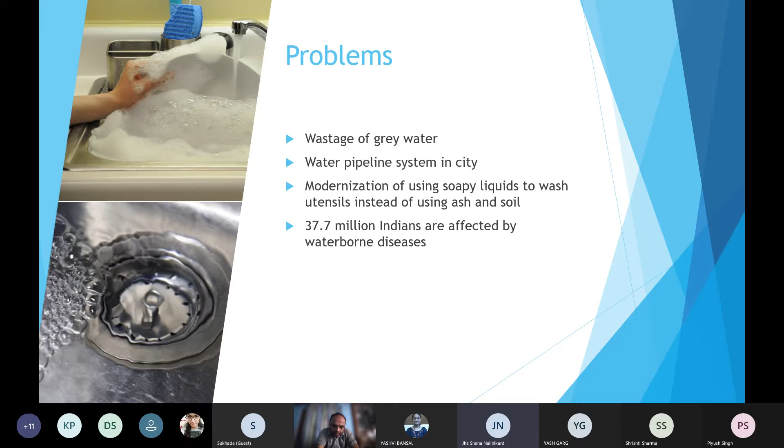The problems we are focusing on: the grey water that is wasted from washing dishes and bathing, and the water pipeline system in cities which is not correct, so we will focus on that too. Also, the modern use of soapy liquid to wash utensils instead of ash and soil, and many people are affected by water-borne diseases, so we are focusing on these problems.

Our attempted solution is to develop a solar thermal evaporation technique using parabolic mirrors, pipes and coolants, and mineral-coated pipes to add required minerals. We are also planning to make a new structure for building piping systems, and for less polluted water, we will use simple filtration techniques.

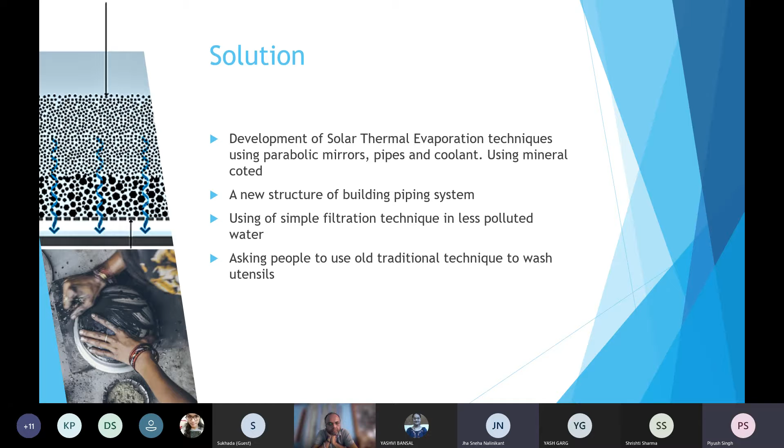We also want to make people aware and encourage them to use the old traditional methods to clean utensils, so that the water will not be polluted as much.

So how we are implementing this: in buildings, we will put two sinks in the bathroom and basin. In one sink, only the non-soapy water will go, because sometimes we're just cleaning dirt, not using soap. That goes through one pipe, and soapy water goes through another sink's pipe, using sensors for that. It will work similar to how in our food pipe, air and food are separated.

Then for non-soapy water, it will be purified easily in the buildings using net sand and simple filtration techniques, carbon and all. For soapy water, we will take it to our solar distillation plant and clean it there.

Since the water will be totally pure, there will be an absence of minerals, so we have to add minerals back in according to need.

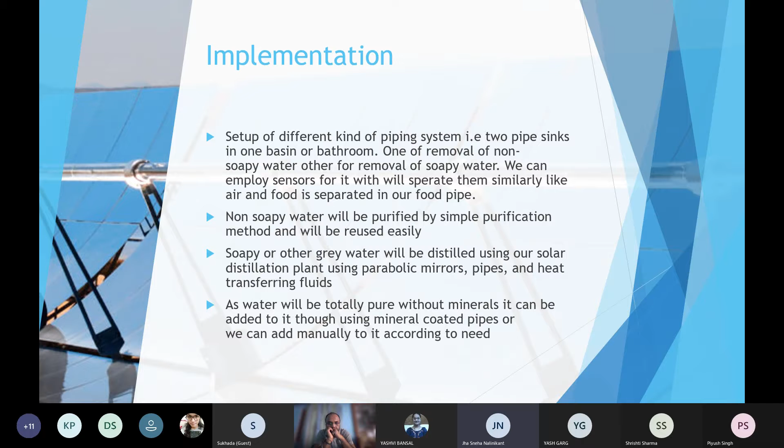Our working process is very simple: parabolic mirrors will concentrate the heat of the sun onto one pipe, in which water will be present, and it will get heated too much. Then we use that heat to evaporate the grey water in one container. This contains a simple distillation setup working like that.

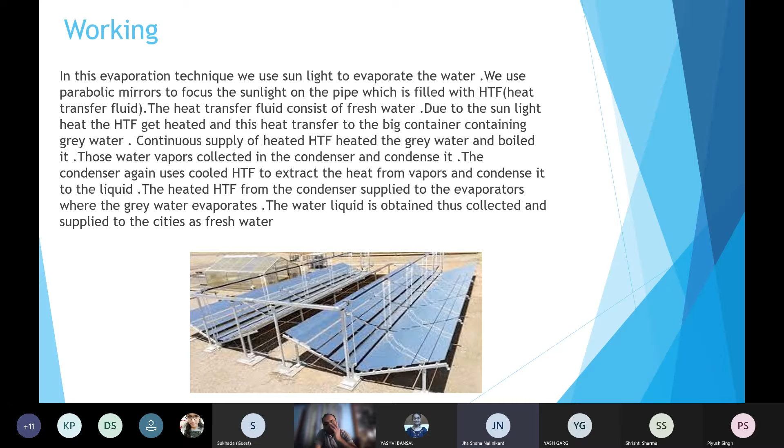We heat the fluid inside, and that heat is transferred to the water, which evaporates and is then condensed in another container, obtaining pure water. Then, by adding required minerals, or coating required minerals on pipes, we send that clean water to the city.

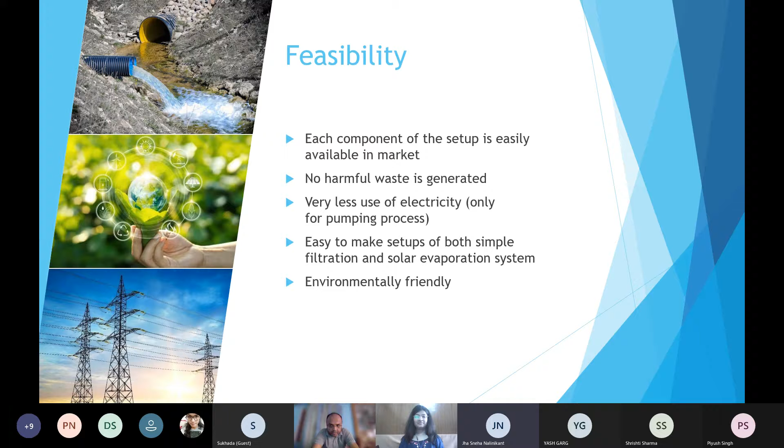As for feasibility, each component of this setup is available in the market. It is also not harmful. We are using solar energy, so there is very little use of electricity, maybe only in pumping processes. This setup is simple and environmentally friendly.

The cost of pipelines, mirrors, and tanks might not be much, and since we are using a renewable source of energy, there is not much electric cost.

The water impact will be that water is purified easily and energy is saved. Since there are special setups in buildings, people will be more aware to save water and try to conserve it more. Waterborne diseases will reduce, and people will get perfect mineral water afterward, according to requirement.

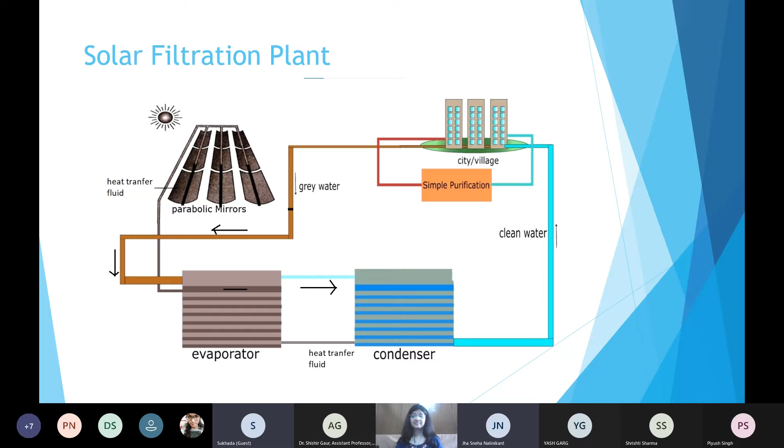And what are your plans to do that? Sometimes it happens that we see a very green type of thing, like in a train also. If we find that all the compartments are good and a dustbin is very near, then people will throw trash there only, but if it's not there, they will throw it out of the window. So also here, if they see that nice setups are made, they will be more spontaneous to save it.

Let's understand what are the problems pertaining to it. Currently, due to a lot of grey water, the water body sources are quite heavily contaminated, which causes a huge amount of deaths and diseases in our country. There is no proper way to measure these contaminants as well as eliminate them. Also, eradication of heavy pollutants like heavy metals and dissolved organic matter is really difficult to achieve at a greater stage, due to which we can see the amount of pollutants increasing severely in the drinking water.

The rate of pollutants is rising at an alarming rate. This goes beyond the consumption level of any human being, and due to this we are seeing a lot of diseases and deaths due to waterborne diseases.

Let's understand what are the impacts of it. In the last 4 years, India has seen around 8,000 deaths due to unclean water, which means every 4 hours one person is dying. Averaging this to a year, on average around 2,000 people die, as per the data of the Ministry of Health.

So can we solve this? Do we have any solution for this? Yes, we propose a three-step model for this, which states detection, eradication, and sustenance. Firstly, we'll have to detect all the pollutants or contaminants present in the water, then try to step by step eradicate them eventually, and sustain the clean and healthy water so that waterborne diseases are completely eradicated from India.

For that, we are introducing a new product called the Jal Rakshak. Basically, it looks like a thermal flask which we use to carry hot water, and let me tell you, it would be probably the same size.

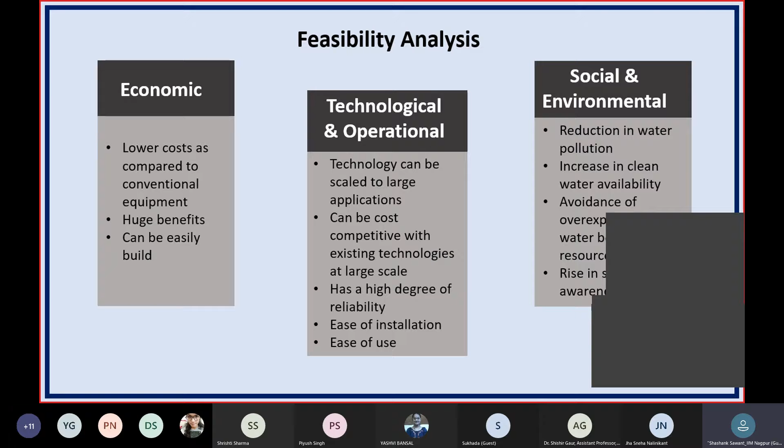Let's talk about the social analysis and feasibility. The pollution in water does reduce to a greater extent if we install this in a timely manner. Also, clean water becomes available to rural people, and the diseases pertaining to it would definitely reduce due to this. Although we do face key challenges, the first would be the maintenance of the device.

Since the device would be completely submerged in water, we would be needing timely maintenance of it, and keeping track of the devices would be really necessary, especially in rural areas. India is a vast land with around 12,500 water bodies, so it would be really difficult to cover all of them.

The time could be decades if we want to cover all the water bodies in India. Also, educating communities in rural areas is particularly important, because they would just take the device out and throw it away, which is a huge problem in rural India, and that's why a lot of schemes are also not implemented properly at the bottom of the chain.

What impact would this solution have? Due to the cleanliness we are going to get, deaths due to waterborne diseases would go severely down, which would also help India in achieving a sustainability development goal. Also, the efforts and expenditure spent in storing water would be saved to a greater extent, and with that, the social and economic condition of the communities would improve at a greater level. Thank you.

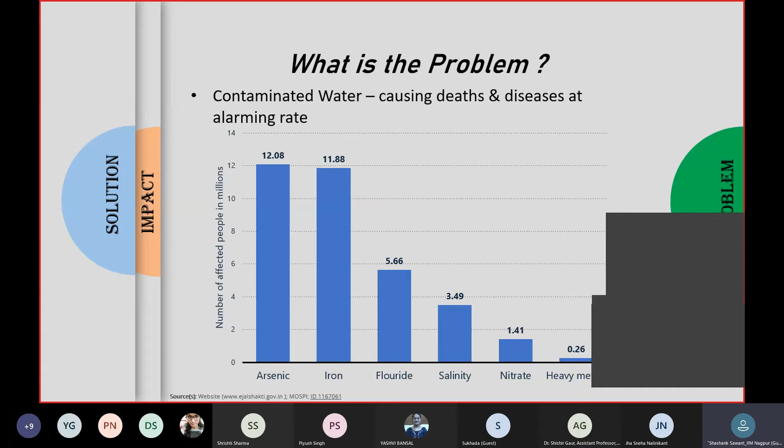Yes, sir. Hello, sir. This is Shashank Sawant. I'm a postgraduate student from IIM Nagpur, currently pursuing the first year of MBA. I've graduated from Savitribai Phule University in mechanical engineering.

Okay, good, so your concept is really good. So what about that prototype? Have you developed it, or are you planning to develop it?

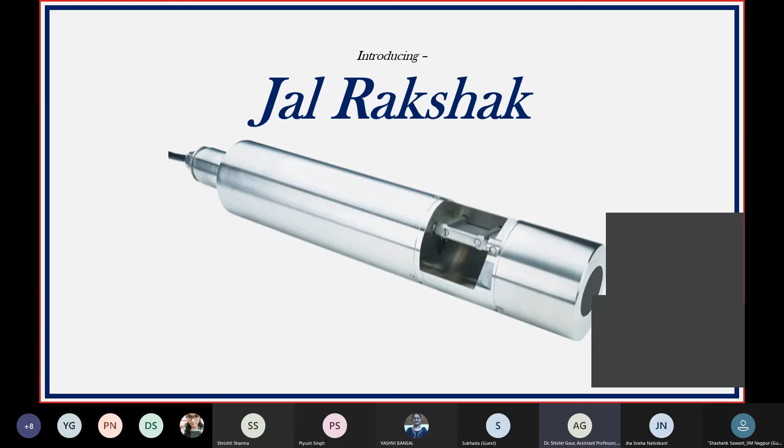Yes, sir. I believe there is a startup idea installed in this. Since this is a requirement, a demand in our current ecosystem, I would look forward to developing it. Although I do not have the capital to develop it as such, I have gone through a few research papers, due to which I was able to garner some level of forecasting of at what level it could succeed. I believe if things go well, I might be able to convert this into a successful startup as well.

Okay, how much funding do you think you should have for developing the prototype? Currently, since we need to pilot test them first, we have to develop them in quantities of around hundreds, so that we can test them in different kinds of water bodies. Since every water body is at a different level, whether salt water, saline water, or fresh water, it would have a different effect, and we have to continuously do R&D over it, which would increase the cost, and eventually the operational cost would increase. So I'll be needing operational cost for around 2 years to sustain. Then we can start selling the product.

Okay, but with the help of UV radiation, you can't do everything, so that particular kind of thing you can address with that. In water there are a lot of possibilities, some chemical properties, physical properties, biological properties. So we have to clean the water in all three aspects.

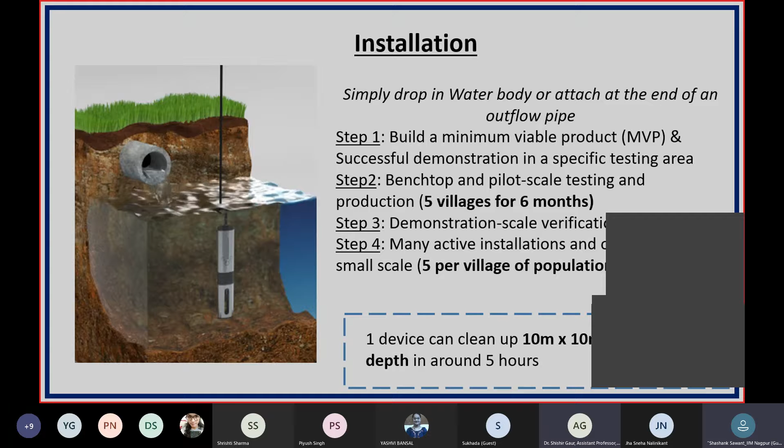My simple suggestion is that you start working on it, and initially first work at lab scale. Just try to do it at lab scale, definitely. Yes sir, I would love to collaborate with IIT BHU for any project pertaining to the same concept.

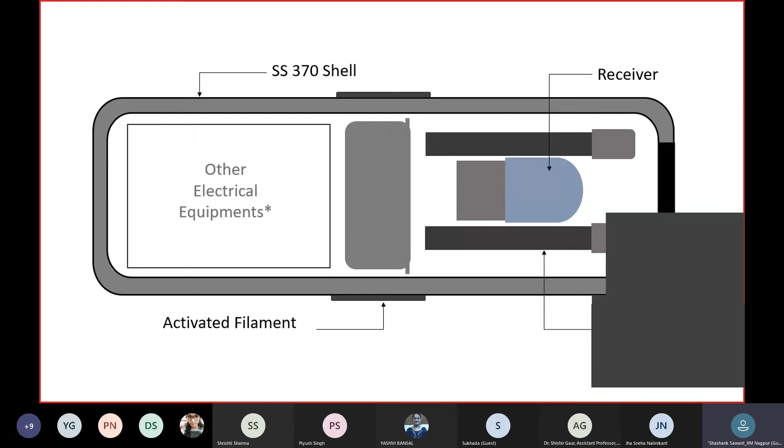Also, you spoke about the connection thing - there are already a few portable devices, and they face maintenance challenges. But in those devices, the principle is contact-based, like a metal strip has to get in contact with the water body, and then it detects with the help of a chemical reaction.

Due to this, the maintenance cost goes really high. So I have eliminated that, since this device is completely based on non-contact principles - we are using light emission and light detection technique to detect the contaminants. This is a competitive advantage we have over our competitors currently in the market.

That is good, that is good. But again, you have to test it at the lab scale to reach any conclusion. Surely. Best of luck. Okay, thank you sir. Thanks a lot.

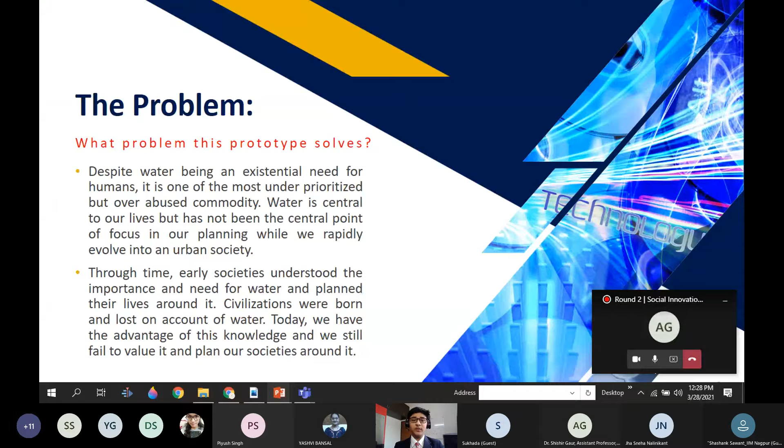How will this help the world, or the solution? The constant search for answers has resulted in a state-of-the-art idea that begins with individual needs and transposes visionary technologies for saving water. The ultrasonic technology integrated smart water tap is an innovative project that cures the water crisis problem with less need for awareness among us. We will no longer need to worry about running or leaking taps and be reliant on others to fix this issue, thanks to the groundbreaking technology used in this idea. Leaking is abolished. It is an inexpensive project that can be implemented in both personal households and at industry levels. It is easy to manufacture and mount.

What is the difference between the ordinary tap and the smart water tap? Well, the main difference is that ordinary tap water faucets are contaminated by germs from multiple users. Now, how does the smart water tap solve this?

They are more hygienic than normal taps because they require absolutely no human contact, meaning they're far less likely to be contaminated with bacteria and viruses like COVID-19. This makes it a feasible solution in public places and hospitals, especially during this pandemic.

Another disadvantage of the ordinary tap is that if it's left open by mistake or while brushing, as much as 600 gallons of water can be wasted each month, assuming a household of 4 people brushing for 1 minute twice a day with a 2.5 gallon per minute faucet.

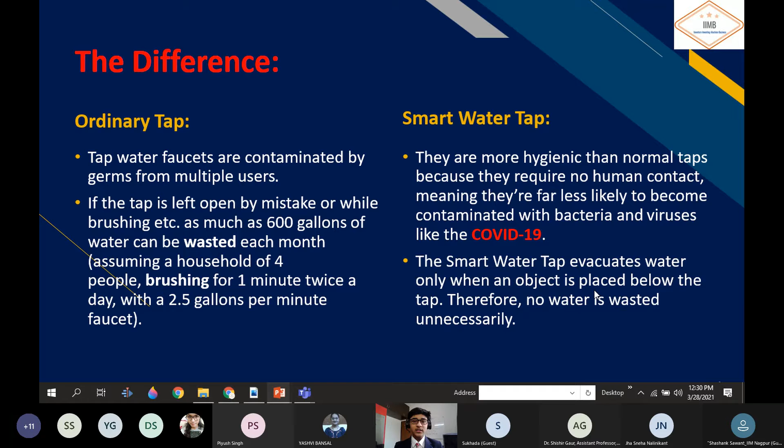How does this astute technology work? This stunning prototype works with the help of an ultrasonic sensor which senses any object placed below it, a 12-volt DC high-pressure motor pump used in the prototype, and in the final production model we'll use a solenoid valve that acts as a digital tap when sufficient power is supplied to it, along with an Arduino Nano, a programmable microcontroller that can control the functionality of many electronic components.

The smart water tap evacuates water only when an object is placed below the tap. This is the future of the water saving culture, and that future is now. You may be wondering that this product already exists in the market, but then, knowing this, why have I made a similar project?

This is because I found some competitive advantages and disadvantages in the pre-existing smart taps. The first disadvantage is that they are way too costly for an ordinary person to afford. The smart water taps we see in hospitals or airports are only present there because of their high cost, and they're not present in households because a normal man would not want to pay 2,000 rupees for a simple tap which evacuates water when we place our hand below it.

However, our UTI SWT is around the same budget as an ordinary tap, offering more features and helping in the conservation of water and the improvement of hygiene. It's also proven that ultrasound is recognized as the most effective disinfection technique for all forms of microbial contamination, even for recalcitrant microbes and spores.

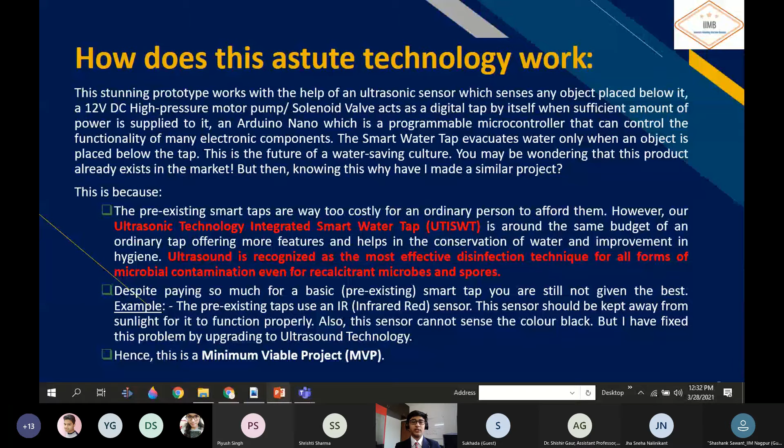Comparison: I conducted research in my school and got some data. I replaced the normal taps in my school with the prototype I had made for my smart water tap, and this is the data that is shown. In our school, BGS National Public School at Bangalore, it consumes almost 3,000 liters of water per day on one floor, and that is a lot of water.

When I implemented my UTISWT and measured the usage of water in 1 week, it was discovered that the UTISWT saves an average of almost 1,036 liters of water every day on a single floor. This proves that almost one third of the water was being unnecessarily wasted, and the UTISWT was successfully able to save that much water. Isn't this a huge saving of a natural resource?

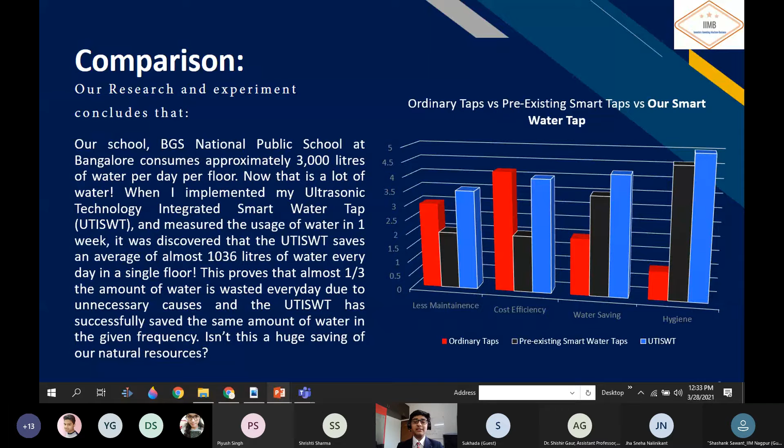I also have many future ideas and enhancements that I would like to do to this. Number one is adding the topic of IoT through the ESP8266 module. IoT is vast, and just adding this to any project opens millions of doors to many more opportunities that lie beyond. That is why I think we can add IoT to this project.

The user will be able to control the proximity of which he would like the water to be evacuated. He can also get the monitoring of how much water he's consumed every month, week, and day. I also have future enhancements of adding more sensors like TDS sensors, etc., to also give him real-time data of the water currently going through his taps.

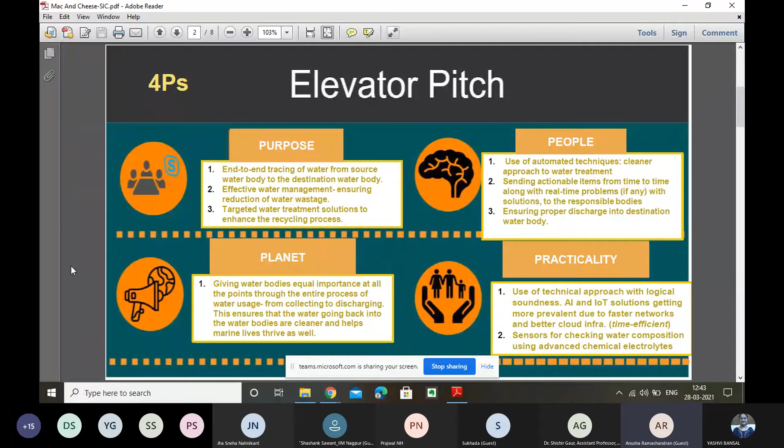The practicality of the solution can be dealt with in the four technical objectives of our model: first, we use AI; second, we use IoT solutions; third, we use cloud infrastructure; and fourth, we use mobile applications. The use of these technical approaches makes it more time efficient, and ensures that we constantly check the water composition, so every person trying to access the water gets it in the best possible way. Here we discuss the technical solution in detail.

Hello, good afternoon everyone. So I would be discussing the technical solution to it. The proposed solution addresses the problem of sewage, greywater, industrial discharge, and agricultural runoff using Internet of Things, with sustainability and topological considerations kept in mind while designing. This project outlines communication methods to provide secure data transmission, taking into account power efficiency. The process of data aggregation and storage, along with the methods and tools employed for analytics, is also discussed. Features of trigger and alert generation are included to facilitate corrective measures.

We have a pressure and a level indicator. So when the water level increases in one of the secondary nodes, and it detects a water level dip in some other node, that is how it will detect the point of failure in that particular node. A similar principle can be used to reroute the water from one manhole to another. If there's a cross junction, it can send the stream of water to one path or send it to another, but there will have to be infrastructure in place for that.

We can prototype it, but currently in the Indian scenario it will be difficult to directly implement. That's why my point is, is that possible? Rerouting means something like if you are detecting something, you have some doors or gates, and you close them and redirect it, something like that you are planning. Yes sir, we are using a pumping motor to pressure the water into one of the streams. If it is of low quality, we pump it into one of the streams reserved for less treatment, which is what we meant by a targeted approach to treatment.

And again, you have to do this in a controlled manner, like how much you can flow at that place, because you have to deal with those nodes also where you are diverting your water. I think the algorithms for that are there, that's not the point, I think you can manage it, but you have to put in that rerouting also. Yes sir, definitely sir, we will. Okay, that is good, best of luck, I think it will be better.

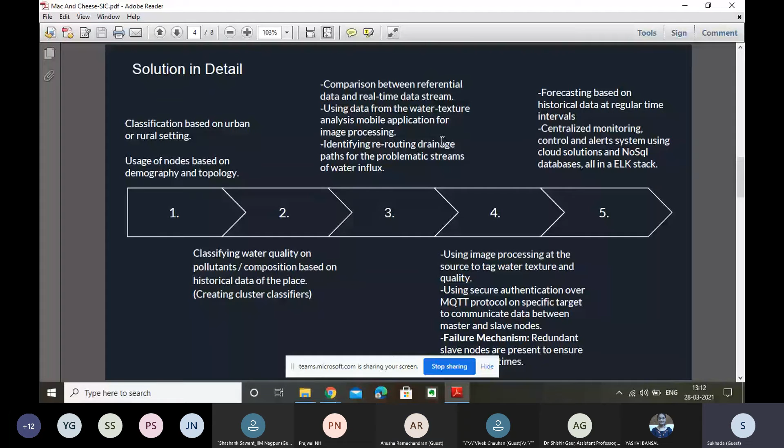Okay, and do you have some testing model, demo model for this? Yes ma'am, we created it during our college time, then we disintegrated it. So we have the simulation at the cloud level in our GCP model, a node or microcontroller that sends the log data, and we are currently working on how we can make it more analytically strong. These are hardware results part from the model, but the hardware part we don't have currently. So you don't have any hardware ready for now? For now, no.

So you have the idea, but as of now you don't have any device to tell exactly what's going to happen or what's happening. Ma'am, we implemented it and then disintegrated it, and this is the visualization results from it. Why did you disintegrate it? Ma'am, it was 2.5, 2 years back. We tried to make it better, and we're still trying to enhance it in the best way possible.

Acha, so these are the results from the model. This is a Grafana visualization from the model, and this is how we detect our monitoring, we detect our data for monitoring purposes. We use it for monitoring.

Okay, so how far have you gotten by redesigning this device? Actually, we are not just working on this particular set, we are extending our research into smart solutions for smart cities. Currently we are developing ourselves more as machine learning experts, and we took on some air solution set, then worked on some image processing. This is how we worked on a smart solution for defense, this is how we are moving. For this particular solution, we haven't actually worked on the Android application perspective.

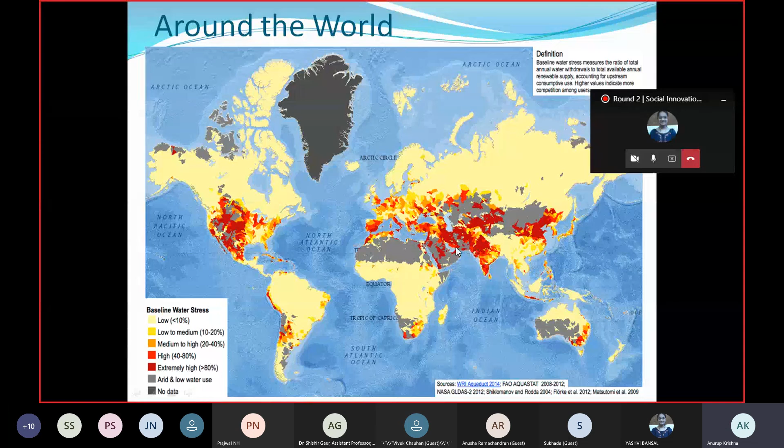To tackle this issue, we have come up with a unique algae-based filtration method. Algae Pithophora, often called horsehair, can survive and grow in wide climatic conditions, especially growing well in the Indian subcontinent.

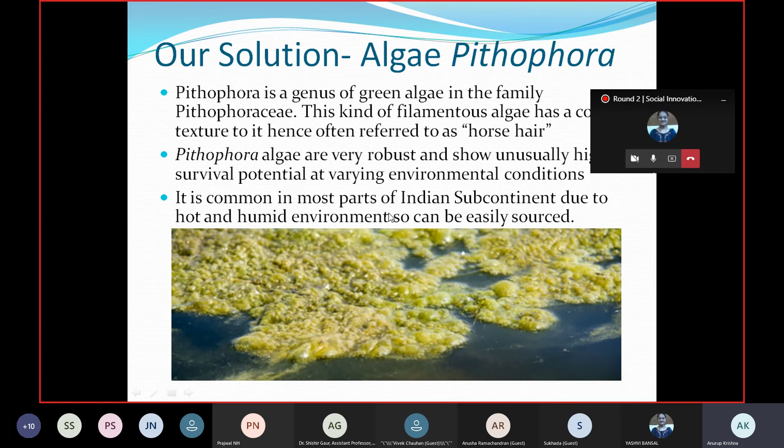How do we start? Till now, this algae is processed to make cellulose, which is made into filter paper, which is used to obtain clean water. It can effectively remove most of the contaminants like heavy metals and other ions and dirt from water.

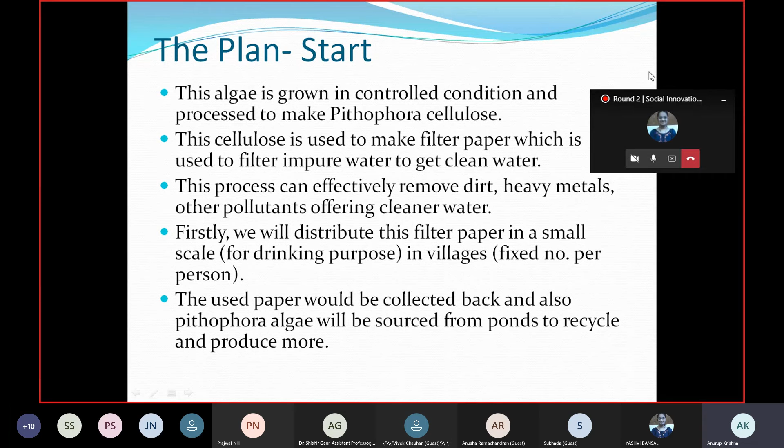To start, we will distribute the filter paper in villages for use. Then the used paper would be collected and sent to recycling. The village ponds may be used as a breeding tank for algae. To expand this project, we can set up a unified filtration tank, or we can make a polymer-based algae filter unit which can filter at a community level.

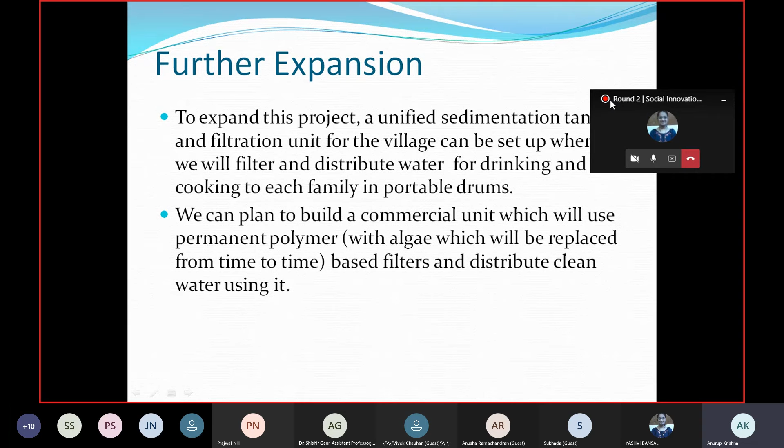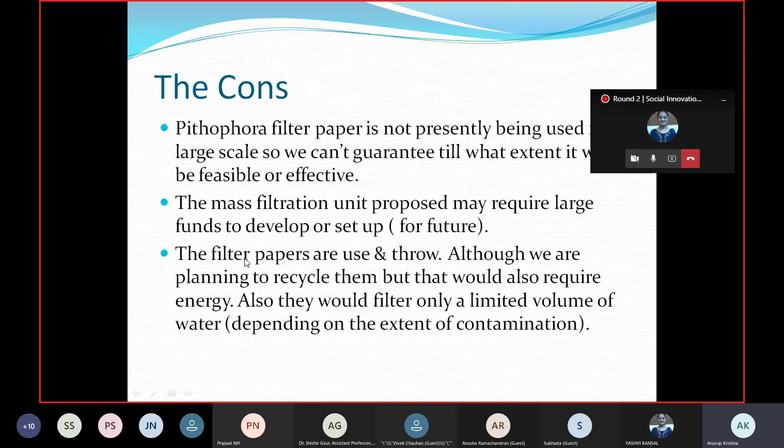Here are some pros and cons of this project. The con majorly revolves around the filter paper, as it is a use-and-throw commodity and should be properly disposed of and recycled. But still, you should consider this project as it is a cheap, easy to use, and portable solution which can remove most of the contaminants and deliver clean water.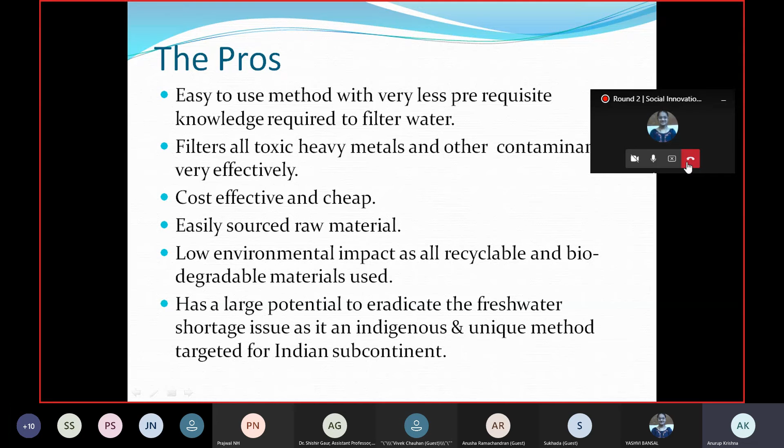Any questions? Krishna, your concept is good, but we are not able to find much information about it. If you can show us a prototype, or present a figure or diagram, it would be better for us to understand, because it is very much theoretical. If you are saying it is already useful, I suggest you perform a lab study: take different pollutants, different levels of contaminated water, apply your filter paper, then give the values or readings of the filtered water. I'm not able to get past it being more theoretical. So what do you say about it?

Sir, it's already been tried in Bangladesh. They tried to grow algae in a controlled environment and then filter with it, and it was successful to an extent there. You can see it in this link.